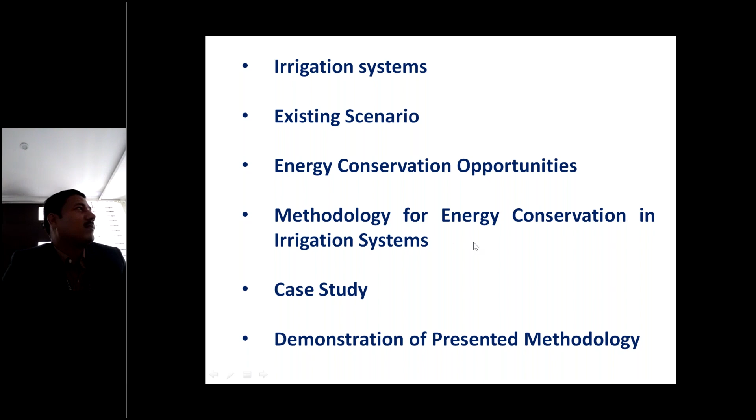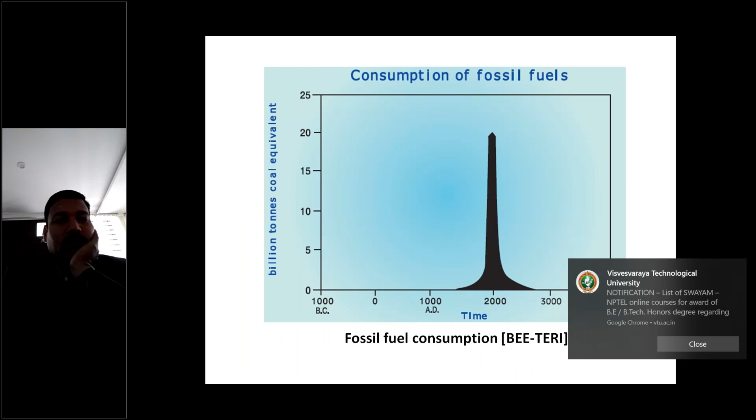Okay. So this slide gives some important, interesting information, like why energy needs to be conserved, and that too when we are speaking about irrigation, which is a very important aspect as far as the Indian economy is concerned. The consumption of fossil fuels - you can just quickly observe this in the present time where all our generation is taking part.

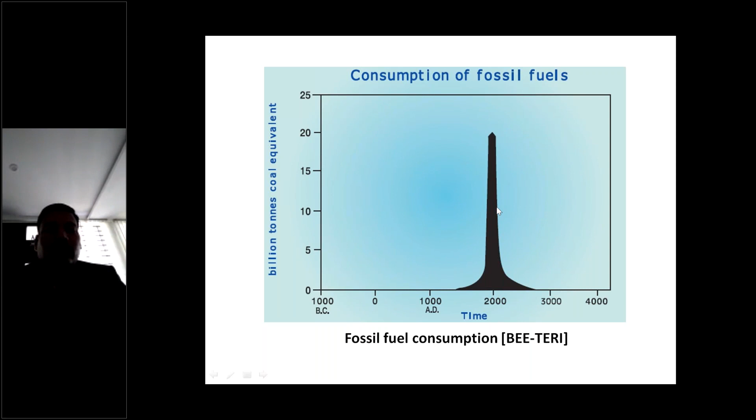So we have consumed most of the fossil fuels. Maybe in and around 2000, most of the fossil fuels have been consumed, and very soon they will be coming to an end. So it is quite obvious that we have to take care about these things. This picture indicates there is some significant need for conservation of energy. Then there are many works and approaches which are already taking place.

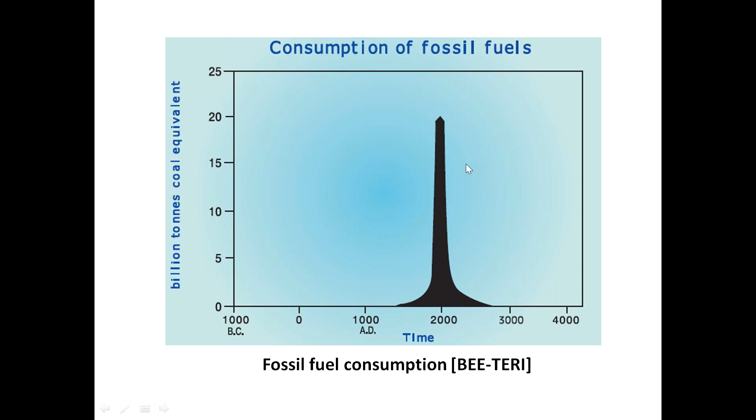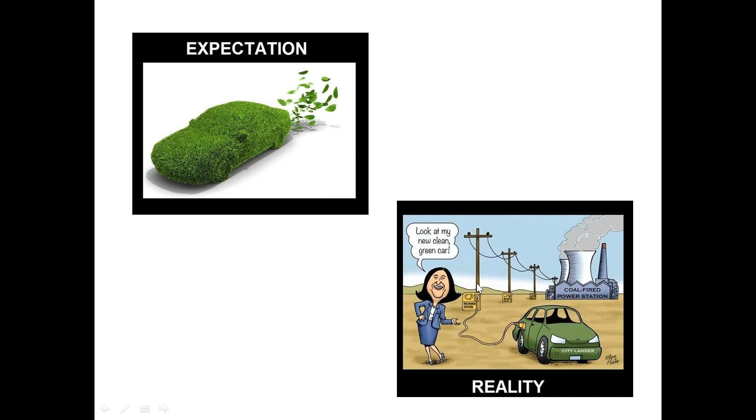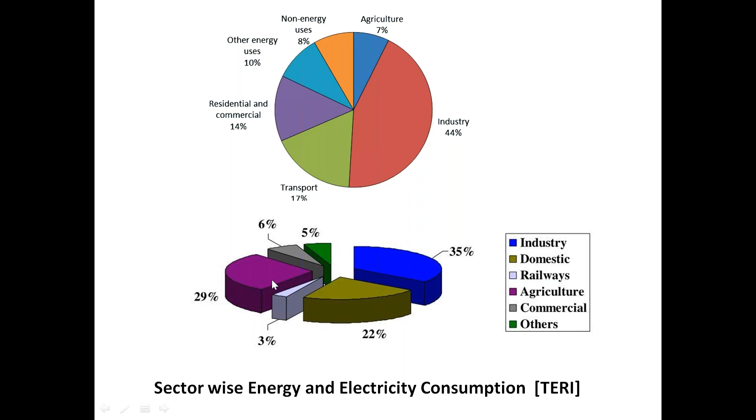This slide indicates that agriculture is contributing to a major part of energy consumption. So of course, this is one of the main components for our GDP also. It means we have to give sufficient opportunity for consumption here. We have to promote this, but also wherever there is provision, we should always be able to conserve that much amount of energy. Now comes the question - what are the challenges?

Now, regularly whenever we speak of conservation, we keep hearing these words. Nowadays, even all the ESCOMs, like BESCOM and others, are promoting this - how exactly we can save electricity and why exactly we have to conserve electricity. And when it comes to irrigation, these are the challenges now. Whenever I speak of agriculture, irrigation is not the only component where electricity is being consumed.

So irrigation is one major component. Other applications are there—farm activities, harvesting, post-harvesting, and many other activities in agriculture which consume electricity. Out of that, one major component is the irrigation.

If you ask what are the T&D losses in Karnataka, or even for India, for electrical engineers, if I ask what is the transmission and distribution losses in the system, the obvious answer will be maybe 25%, 30%, 35%, up to 40% or so. But for Karnataka, if you ask the officials, it will be quite lesser than that. They will never tell you it is 30%.

The reason for this is the major component of the grid load is agriculture. So at least around 20% of the load will be agriculture irrigation load, and all these irrigation loads don't have any metering infrastructure.

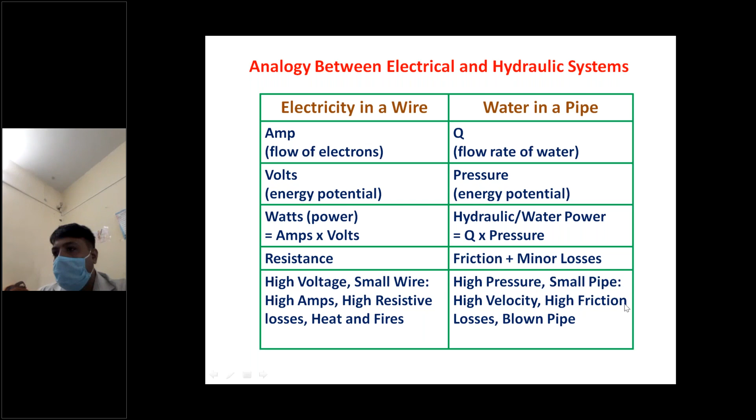Same thing happens for this water pipe also. If the high pressure is there and the pipe is very small, obviously the pipe will also get blown out. So this is what the meaning is.

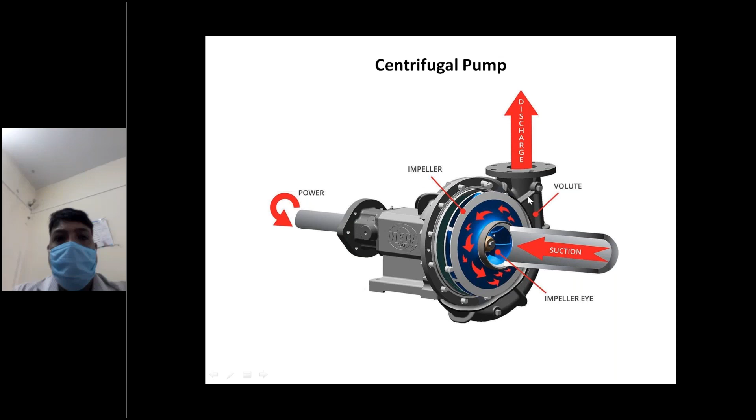And this is another view of the centrifugal pump, which is a DC water pump, usually used for SPV coupled operation. So this is the foot valve, as we usually call it in regular use. It is at the starting point of the suction pipe. Water is taken to this point by virtue of the centrifugal action. Then water is rotated in this impeller, then it is discharged.

So this is called the discharge head. And this is called the suction side head. The word 'head', whatever the indication is there, all the time refers to the pressure requirement for the irrigation pump.

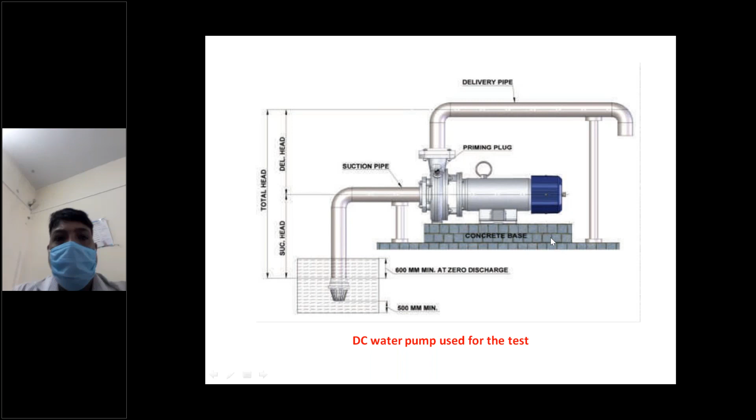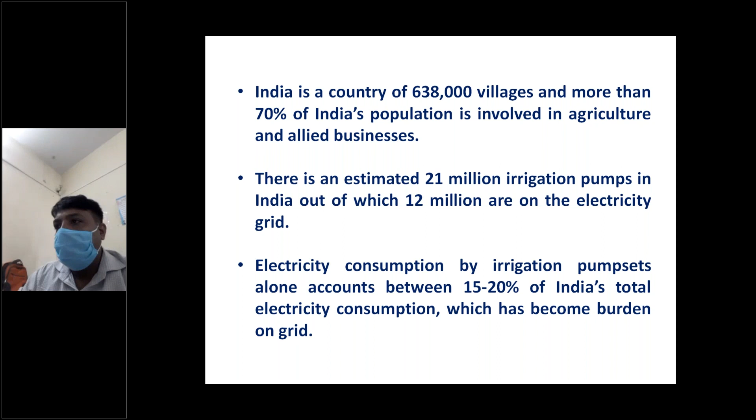Now this is some quick information about irrigation. We all know irrigation and agriculture is one of the important aspects as far as the Indian economy is concerned. India is a country of more than 6 lakh villages, and more than 70% of the population is involved in agriculture and allied businesses. So there is an estimated 21 million irrigation pumps, out of which 12 million run on electricity. Some of them, in Punjab and Haryana, use diesel pumps also. So electricity consumption by irrigation pump sets alone accounts for around 20% of India's total electricity consumption.

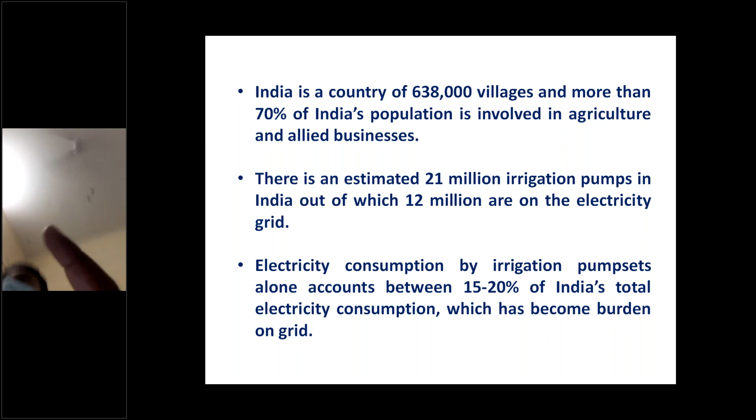Of course, this has become a burden on the grid. We cannot call it a burden because irrigation and agriculture is an important aspect. But when other options are available, this burden can be eliminated. In that angle, it is a burden when other options are available.

Farmers install excessive pump capacities and multiple pumps. This happens because the irrigation pumps don't have any metering facilities. Farmers in Karnataka, at least, don't pay the electricity bill for whatever they consume, and this leads to what is called cascading of excessive pump sets. So if electricity is available for 6 hours, then rather than using only a single pump set, farmers use 2 pump sets so they can pump a sufficient amount of water. This is what the farmers think.

We cannot call it a mistake because the provision is available from the farmers' end. But as engineers, what we have to do is not avoid farmers using electricity, but optimize the use of electricity without affecting their requirement. Now this issue can be resolved by identifying excessive installations and resizing them optimally. I'll be using the words 'optimally' and 'optimization', which indicate the exact suiting of the exact requirements of the farmers. The optimized irrigation load will reduce the burden on the grid, as well as help us achieve energy conservation.

The alternative sustainable option is SPV powered irrigation pumps. If all the irrigation pumps are coupled to an SPV solar PV system, you can imagine 20% of the load is disconnected from the grid. It means a huge amount of carbon emissions will be eliminated from the system, or will not be released to the atmosphere. But the question is how to move from conventional grid connected irrigation pumps to SPV powered irrigation pumps.

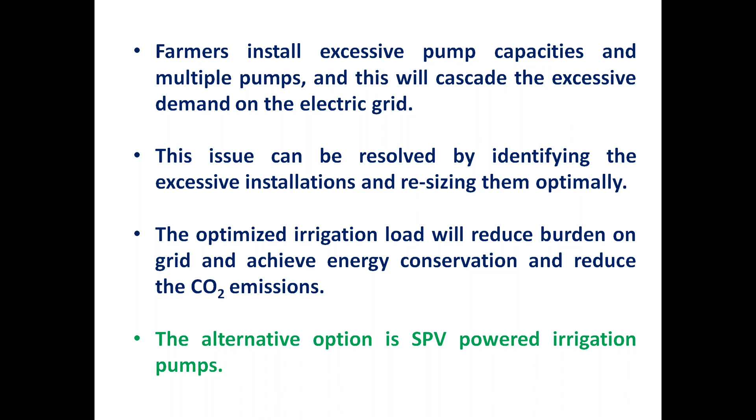For the same size, if you want to suggest SPV pumps and corresponding SPV panels, the cost of that system will be very high. So even if you want to go for an SPV system, the pump size should be optimized to the actual requirements, rather than just reduced.

Now the question is how to find out the actual requirement. This is the typical block diagram of irrigation pumps. Energy is required, either solar or grid connected electricity. There will be a motor and a pump. The motor is a device which converts electricity into mechanical energy, and the pump is a device which converts mechanical energy into hydraulic energy. In the market we get the assembly of motor and pump together.

That is what we call a water pump, a combination of motor and pump assembled together. So a water source will be there, it may be a bore well, open well, or river bed, anything. Water can be pumped and stored in a storage tank, or directly supplied to the crops.

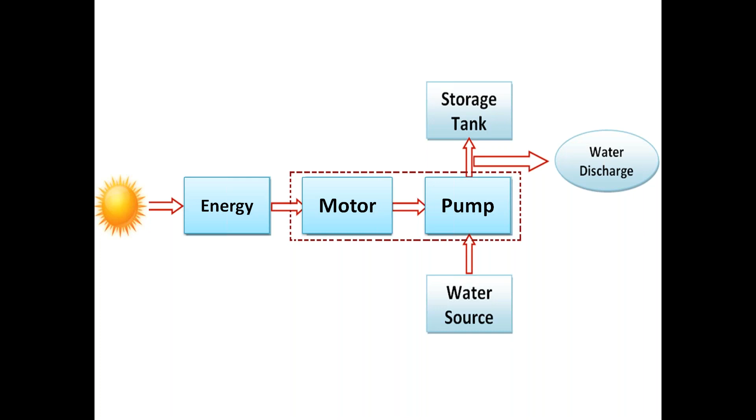Now the question comes, energy conservation and how it can be achieved in irrigation. The definition of energy conservation, I hope all students are already aware of. When I use this word energy conservation, it is not just saving electricity. It states saving of electricity without affecting the comfort zone.

Suppose you want to conserve electricity in your homes, it doesn't mean all lights, fans, and loads are to be switched off. We have to switch off loads without affecting our comfort zone. Our regular activity should continue.

Wherever excess consumption is there, that has to be identified, addressed, or eliminated. For homes, domestic loads, and institution campuses, we can readily define how to save electricity. If I ask any faculty member or student, they will give a list of options for how electricity can be conserved in campuses or homes.

But how is electricity conserved in irrigation? This point itself is very important.

Now for farmers, the comfort zone is water requirement. For a room where we are sitting, if we want to save electricity, the comfort zone is sufficient lighting, and incandescent bulbs can be replaced by CFLs. But for farmers, their comfort zone is their water requirement and reliability. Without affecting their water requirement, we have to conserve electricity.

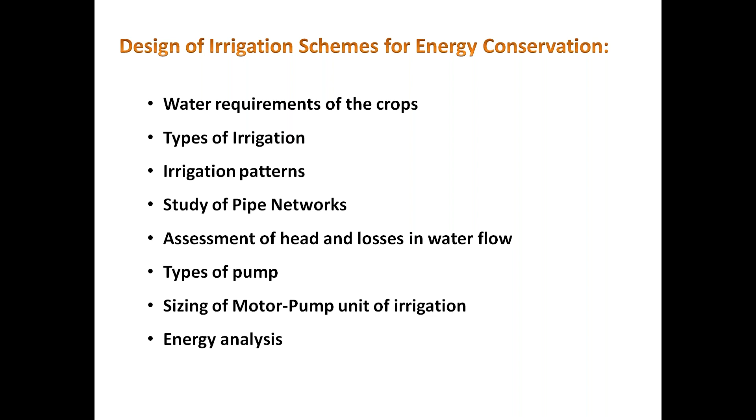There are basically three main steps. First is the crop water requirement calculation. Second is hydraulic head calculation, that is the pressure requirement calculation in the irrigation system. Third is pump calculation, what is the rating of the pump.

So ultimately what we are doing in this process is we are looking into the farmer's requirement and resizing his actual requirement for the irrigation pumps. Then when we optimally suggest him irrigation pumps, obviously energy conservation will be achieved.

For that, we have to observe the type of soil in this particular land, temperature, rainfall and sunlight in his agriculture land, the crops he is growing, and the method of cultivation. Looking into all these climatic factors and the type of crops the farmer is growing, we have to calculate the water requirement. Then on the other hand, the heads of pressure losses are to be calculated.

Frictional head means when water is flowing in the pipe network, or maybe PVC pipe, it will face some amount of friction, and by virtue of that, some amount of energy will be lost. Due to velocity, there will be some pressure. If they are using some bends, 45 degree or 90 degree bends, while water is flowing, some amount of energy will be lost due to friction. The same thing happens when there is a change in the area of the pipe.

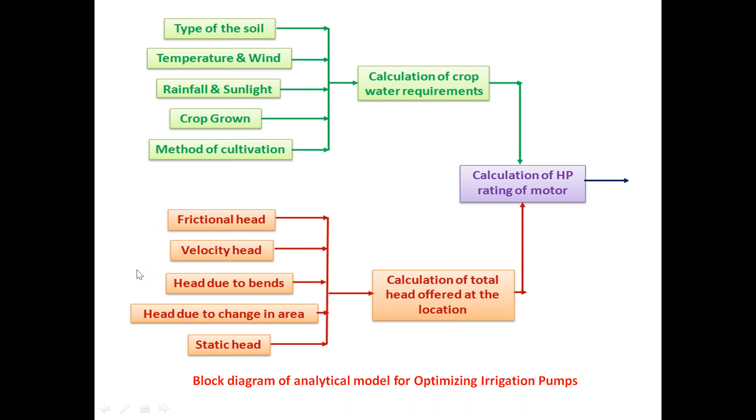Using all these possible combinations, we have to calculate the total head offered. This is the exact head available in the agriculture land, and this is the exact water requirement in the irrigation system. Based on these two components, we have to design or recalculate the HP rating of the pump.

Now there are different schemes or systems available. Most of us, including me and our generation, are from a farmer background family — either us, or our parents, or at least our grandparents will be farmers. So most of us are well aware about this. The first one is called surface irrigation, the second is sprinkler, and the third is drip irrigation system. What exactly happens in all three, every one of us is well aware.

Now, when we want to conserve energy, we should make use of the best technique which will help us conserve energy. In the first case, a sufficient amount of water will be given to the agriculture land, but there will be some losses. You might have experienced there will be some cracks in the agriculture land, so water will be supplied to those cracks, and a sufficient amount of water will be lost there.

That amount of loss is called percolation loss. This may not be supplying the crop water requirement — it will just be supplying to the earth, not directly to the crops. If you are using drip irrigation, the water will be directly supplied to the crops, so water will be conserved. Along with that, electricity will also be conserved, because we'll require smaller irrigation pump capacities. So we have to employ these methodologies also if we want to save electricity.

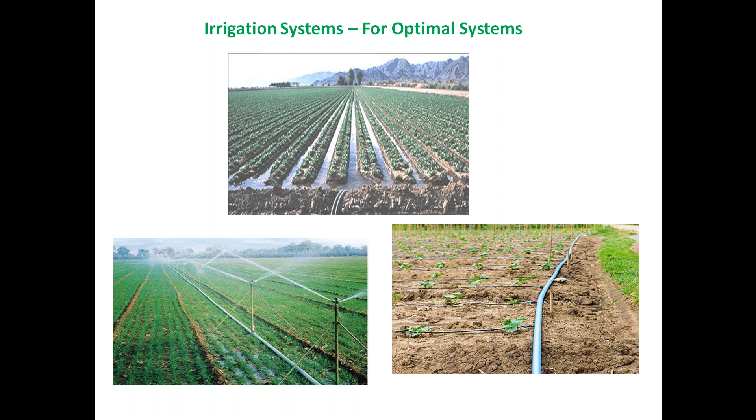All these things have to be done for homes or domestic loads, or it may be anything. The same thing should be employed for irrigation systems also. These have to be improvised.

Then comes the first step, crop water assessment. We have to actually calculate the water requirement of the crops. Now there are many methods available. This is one method which I am explaining.

Concept of evaporation and transpiration. Together it is called evapotranspiration. In your earlier studies, maybe in botany, you might have heard these words, evaporation and transpiration. Together it is evapotranspiration. The water that is given out to the atmosphere is known as the evapotranspiration.

So it is called ET crop. It means the crop evapotranspiration. There are some crop factors, and these crop factors will be deciding the crop water requirement.

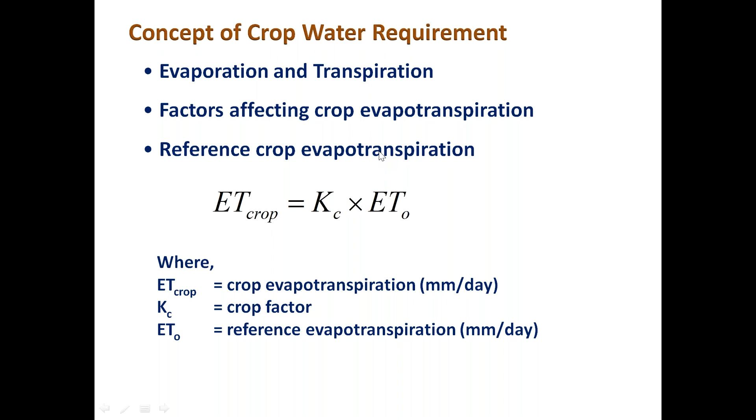Now if you ask the farmers what is the water requirement for the different crops, well, they will always suggest some water, but they will not be able to suggest water in terms of liters. So if you ask farmers to tell water requirement in terms of liters, then it is a little difficult for them. They are not used to that system, but that is required for us for designing the irrigation pump calculations. So for calculations, we have to make use of the best method which will give the accurate water requirement.

Which method do we have to select? That depends on the climatic data availability. If you have a weather station in your agriculture land, in that particular location, whatever data is available with you, based on that you can select the method. Ultimately, we have to calculate the crop water requirement of that particular agriculture land.

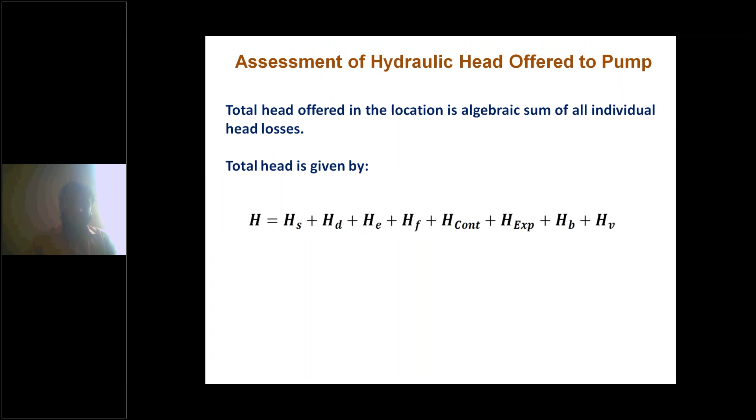Static head is the static height available on the irrigation system, either on the suction side or the discharge side. Usually in our homes, the suction side is very less and the discharge side will be maybe 2 or 3 floors. Whereas in irrigation systems, the suction side will be a river bed, maybe 20 or 30 feet, with a green colored pipe for suction. The discharge side water might be pumped a sufficient larger distance, sometimes up to 1 kilometer in river bed systems. So these two are the static head, suction and discharge.

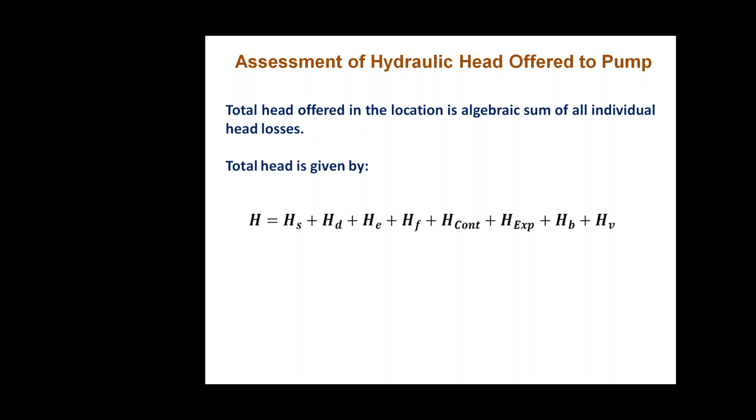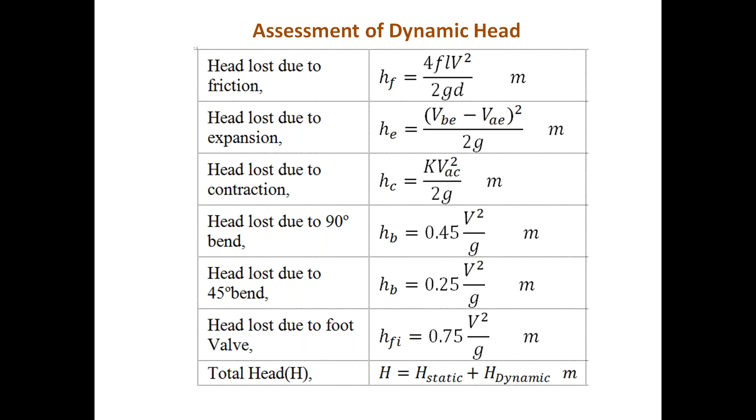There are different types of losses called dynamic losses, which are due to the flow of water in the pipe. This slide indicates different losses that take place in the pipe network: head loss due to friction, with corresponding equations presented; head loss due to expansion and contraction; head loss due to bends used in the pipe network; and head loss due to valves, since different types of valves and T structures are used in the pipe network. All this information can be employed to calculate head loss.

Now, assessment of flow rate and pipe diameter. Typically, the total water required per day has to be supplied within the span of electricity supply hours. For Karnataka, we know that farmers are made available with 6 hours of quality power.

Sometimes in summer seasons it will be reduced to 3 hours. Many options will be there according to power availability, but in general, for Karnataka, it is freely supplied for 6 hours. So based on that, in a given day, if 1 lakh liters is to be supplied for a given agriculture land, it means 1 lakh liters are to be supplied in a span of 6 hours, that is liters per hour. That is the calculation we have to employ in our design.

Suppose 3 hours is the supply hours, then obviously we have to recalculate the supply flow rate of water. Now you may ask, sir, electricity supply hours sometimes will be 3 hours, sometimes 6 hours, sometimes abundant power will be there, sometimes 9 hours will also be supplied. What is the methodology? We cannot keep calculating or keep replacing the irrigation pumps often, but in general we have to use some optimal amount of electricity supply hours for calculation.

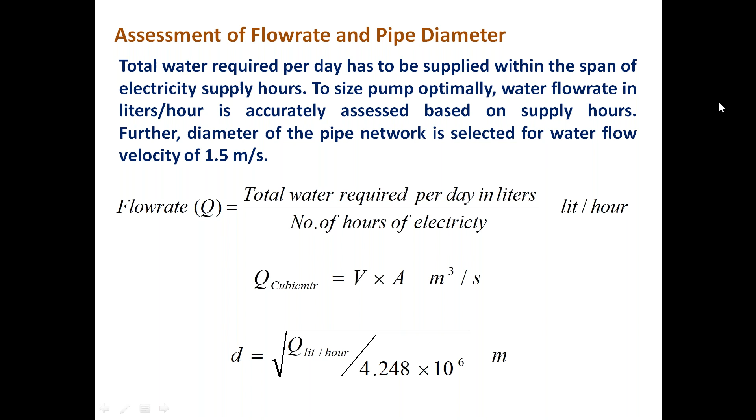Similarly, crops require different amounts of water at different stages. There are mainly 4 different stages: the initial stage, the development stage, the mid-season stage, and the late stage, just before harvesting. Out of all these stages, in the mid-season stage, where crops are sufficiently grown and their leaves are sufficiently exposed to sunlight, the water requirement will be sufficiently larger for the crops. So that is the condition we have to consider. We calculate the water requirement for that particular condition, then calculate the irrigation pump for the large amount of water requirement, and then it will suit all possible conditions.

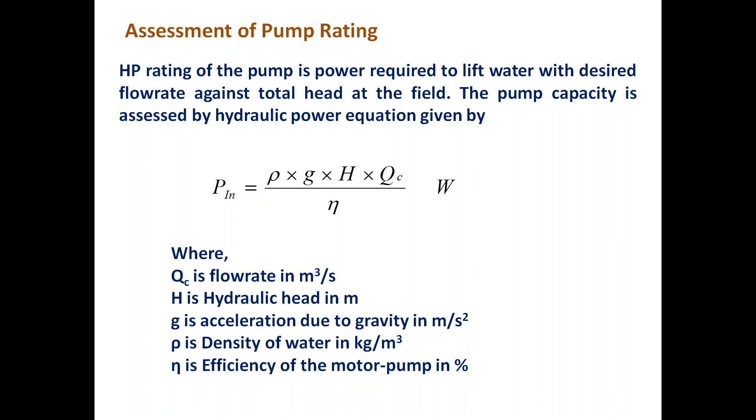Once the head calculation is completed, this is the equation used to calculate the pump rating: rho g q h, h into q, which gives the pump rating in terms of watts. Obviously, if you substitute all this data, the pump rating will be available. This may not be a standard pump rating, but we have to suggest the suitable pump rating. All this explanation can be represented by this flow chart.

To validate this particular methodology, I'll be presenting a case study which was carried out in the Malaprabha riverbed. Malaprabha river is well known to all of us, North Karnataka people. In fact, it originates somewhere in Belagavi district itself.

Bagalkot is also having a good amount of help from this Malaprabha river.

So this is the methodology employed for carrying out this energy conservation and analysis. First, we have to conduct a survey of agriculture land. We have to approach the farmers, ask them what type of crops they are growing, what is their soil condition, and how they carry out the irrigation for their crops.

Then we have to observe their land, and calculate the hydraulic head for that particular agriculture land. What is the distance from the riverbed? What is the distance from the bore well or open well? Then we have to calculate the water flow rate, and correspondingly suggest them the optimum size of the irrigation pump capacity. Once that is suggested, with reference to their existing irrigation pump, we can calculate how much electricity we will be able to conserve.

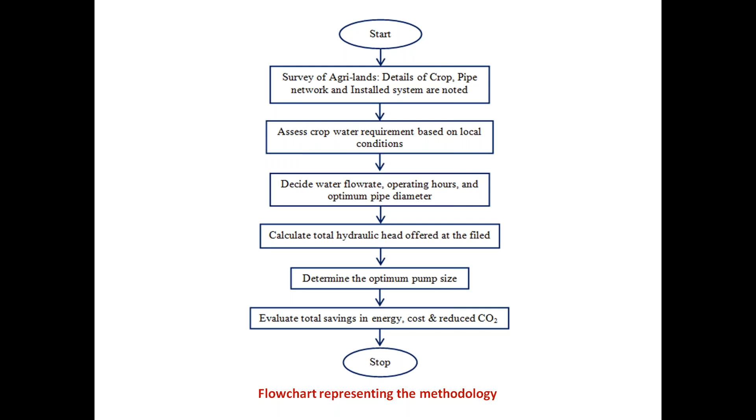So this is the case study. Before that, I will be presenting the methodology that is employed.

The methodology that I explained, we have tested this using a MATLAB program. The MATLAB program is developed for this methodology, and will be used to suggest irrigation pumps for the farmers. When we run this MATLAB program, it will keep asking us the actual requirements of the farmers.

Now it is asking for the assessment of optimal irrigation pump capacity based on the crop water requirements and the local field conditions. So we have to enter the farmer's details for this. In fact, we should have the farmer in front of us, in front of the computer, then start entering the details. We are requested to provide all the crop details and the field details.

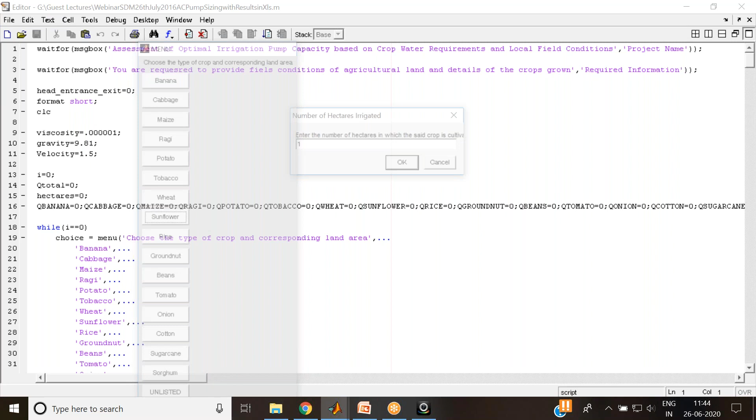Now it is asking to enter the different types of crops, so the farmer can enter the crop details. I will select some crops, maybe sunflower. Then it will ask how much amount of hectares. I will enter it as 4 hectares of sunflower. Now I have entered 4 hectares of sunflowers.

Then I can add some more. I can add maize, grown for around 5 hectares. Then I will complete the crop types and finish the entry of crops here. Now I have completed the entry of crops. So 2 crops are entered and corresponding lands are also entered.

This program says the total water required for the agriculture land is this much amount of liters per day, that is 4,71,975, and the total land is 9 hectares.

Then it will ask the electricity supply hours, how much amount of electricity supply hours is there. Typically we use 6 hours. Then it will calculate for 6 hours how much amount of the flow rate is there. The total water required per day is displayed, and the discharge rate in liters per hour is displayed.

So corresponding to this we have to go further. Now the discharge in liters per hour is around 78,000 liters. Then we have to select the corresponding irrigation pipe network.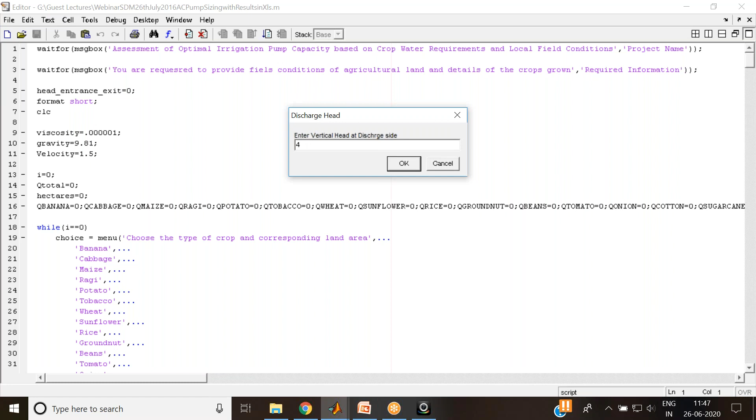So on the suction side, let's say we have 6 meters of distance, an open well or a riverbed irrigation pump. 6 meters is around 18 to 20 feet. So 6 meters is the suction side and the discharge side is around 4 meters. Then it will tell us the suction side and discharge side heads, and the total head calculated is 13 meters. Total head means the farmer's irrigation pump has to pump the water against this much amount of resistance.

Then efficiency, typically the best efficiency point will be available to us. I use around 70% here, and this is quite less for DC water pumps. For AC pumps it is quite high.

With this, the power required to discharge 78,000 liters per hour at a head of around 13 meters is 4,235 watts. This can be converted into HP ratings, so now it is saying the required power rating is 5.6 HP.

As we are all aware, 5.6 HP pumps are not available, so the nearest pump size has to be suggested to the farmers. He might have installed 10 HP now, but his actual requirement is 5.6 HP. This is what we as engineers should suggest to the farmers.

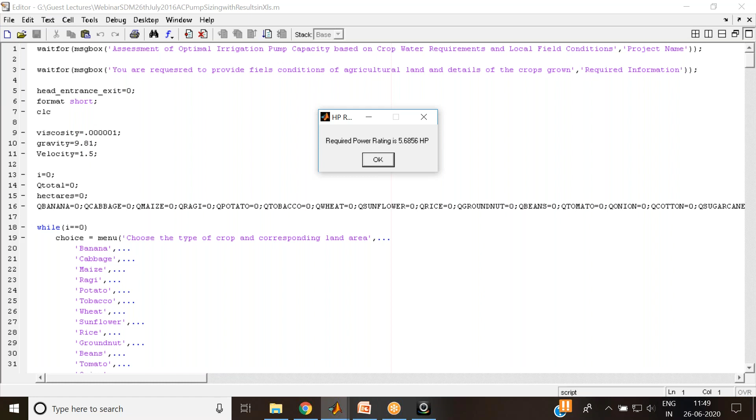The farmers may not directly agree to this because it will sufficiently reduce their water supply. But somehow we should convince them that this is sufficient for the healthy growth of the crops. Then we should also convince them about energy conservation. Then they might agree to this.

Then the existing installed pump capacity, suppose for any case a 10 HP irrigation pump is installed, the indication is an excessive rating of the irrigation pump of around 3,214 watts. That much amount of excess installation is there. So we enter the operating hours of the irrigation pump, and it will calculate the energy consumed by the installed pump and the energy consumed by the newly proposed irrigation pump. Then the difference is stated.

So per day we will be saving 41 units of energy with that. Then the total generation cost saved per day is this much - maybe 79 rupees can be saved per day with 9 hours of operation. So if meters are available, then this can be done very effectively, and we can actually calculate exactly what the consumption from the farmer's end is. I hope this demonstration will help you understand exactly what the need is.

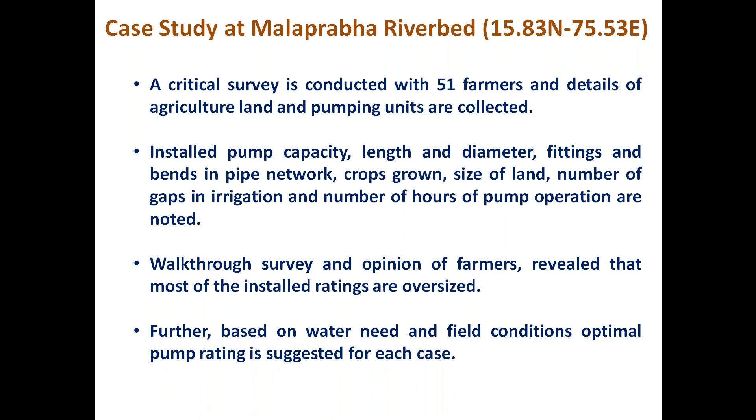This is the methodology used for the case study that we carried out. A case study was conducted at the Malaprabha riverbed near my home village, my native place, Kitli village. A critical survey was conducted with around 51 farmers, and the details of all the irrigation pumps, pipe networks, and crops were all collected. Then we suggested the irrigation pump capacities to them.

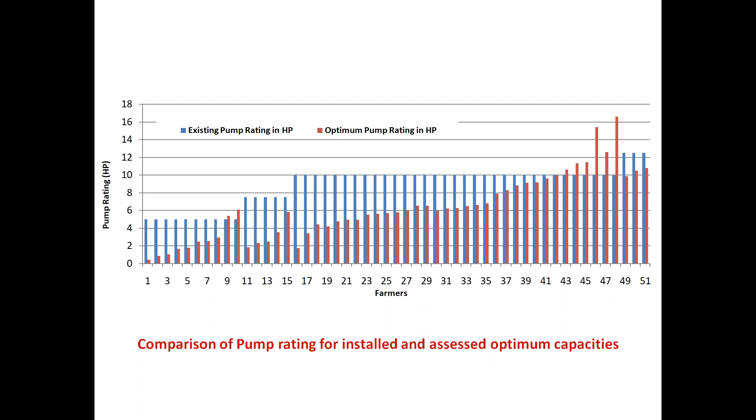So this indicates excess capacity installed in several cases. Whatever the red colored line indicates, all these are excess capacities. Now these excess capacities, in the opposite direction, indicate that much amount of shortage is there in the installations.

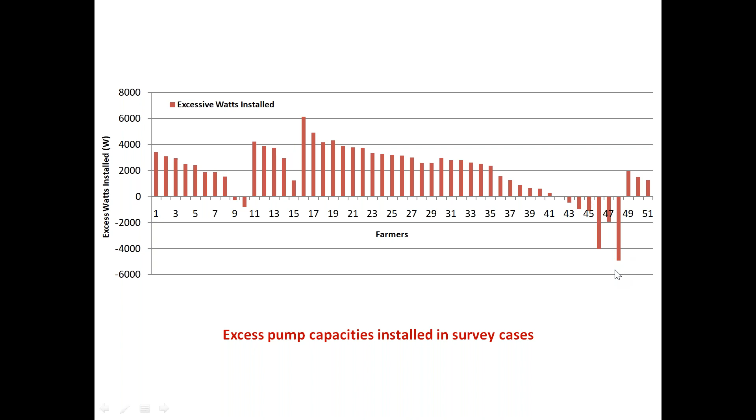So this is how the energy conservation is calculated. Energy conservation, cost savings, and CO2 reduction is calculated.

Cost savings: suppose if you save around a certain number of units, then it can be multiplied by 2 rupees, thinking that 2 rupees is spent for that much amount of electricity generation, then we can save that much amount of rupees.

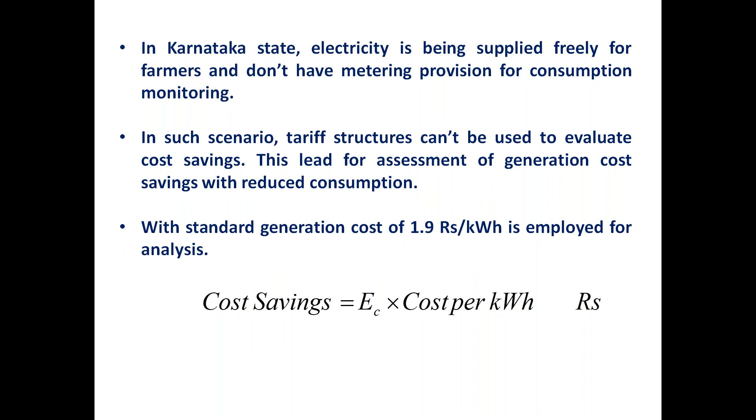Then this is about CO2 emissions. In the standard protocol, we can get this from references.

It is estimated that each unit of generation in India accounts for 0.9 kg of CO2. It means it is not the weight kg of CO2, it is volumetric.

It means 1 unit of electricity will prevent 1 kg of CO2. So maybe like 100 party balloons of CO2 can be reduced.

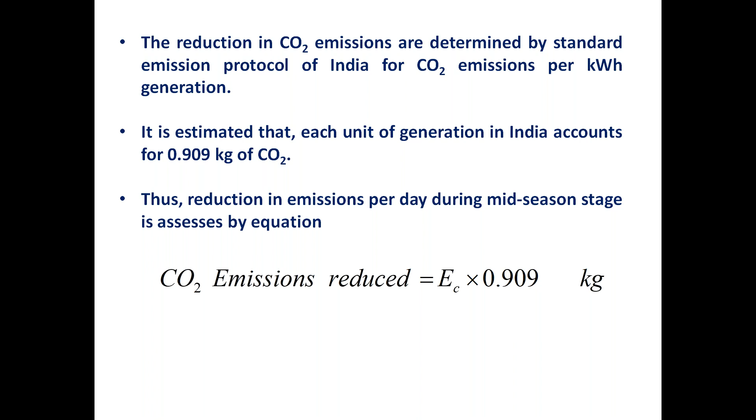Maybe a room size of CO2 can be eliminated by just saving 1 unit of electricity. So it was observed from the results that out of the case studies, around 30% excess installation was there.

Even though we are calculating sufficient water requirement in all the calculations, when we calculate the actual water requirement, we should also account for some losses. There will be some cracks in the land which will not be feeding the agriculture crops, so we have to take care of these cracks also.

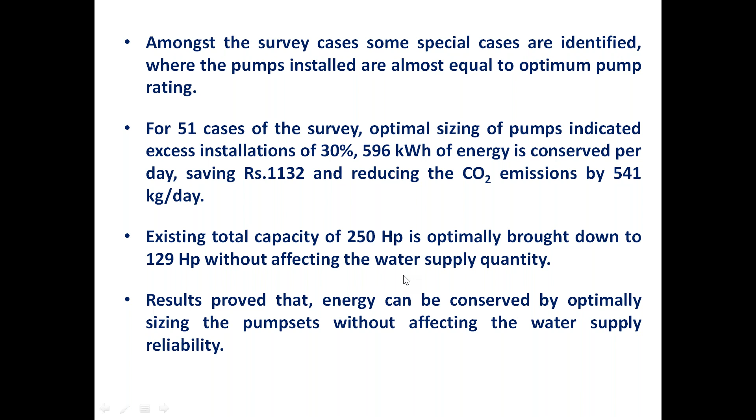So this indicates there is sufficient provision available. Now this is the ongoing work.

Some of our students are working on developing an Android application for calculating the size of the agriculture pump. Nowadays farmers, most of them are using smartphones.

Even the traders or shop owners can also use this particular app. This app will give suggestions if the farmer provides all his agriculture land information.

If the farmer is entering all his data in this particular Android application, at the end this will provide them the actual requirement of the irrigation pump capacity to his requirements. So then he can make use of this, and very soon we'll make it available in the Play Store, hoping soon.

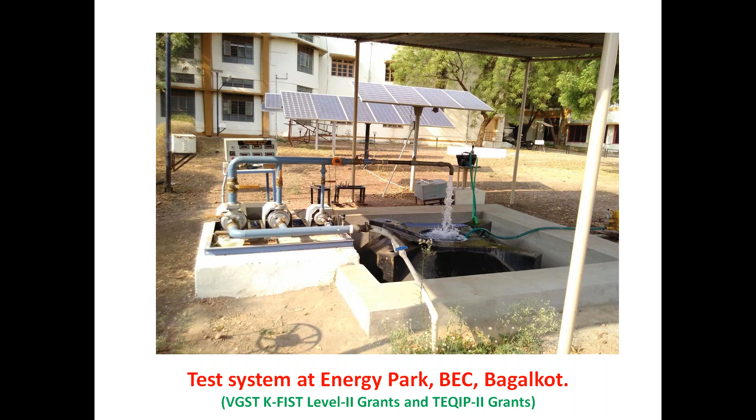So that proposed methodology is validated by conducting experiments, and we have developed this custom setup to monitor the performance of these irrigation pumps, which is installed under different research grants, under VGST and TEQIP grants of our institution. These are some of the images while testing the irrigation pumps.

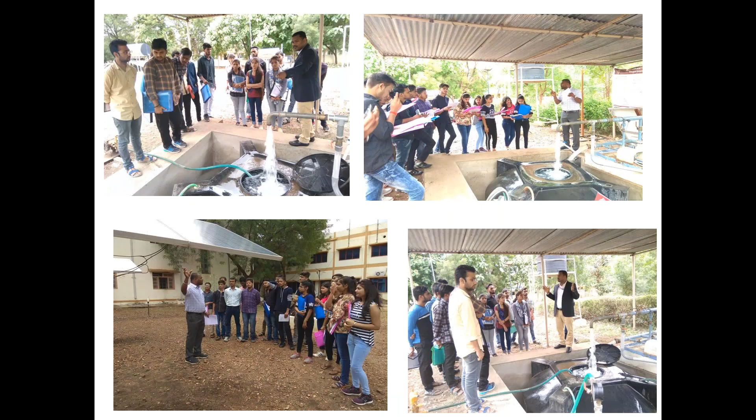Our head of the department, Dr. Jangam Shetty, is there in the picture, and these are some pictures while conducting the internship for undergraduate students. Internships will be conducted on this setup to study and understand the methodology of irrigation pumps. Students will be designing their own irrigation pump for given requirements.